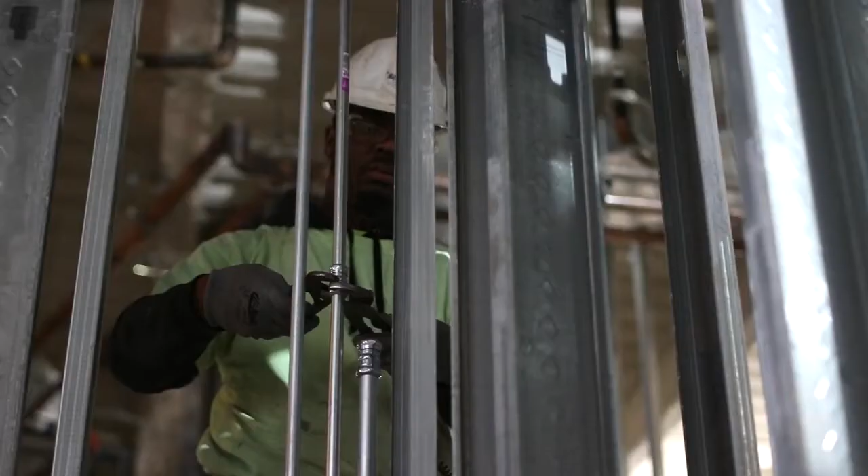I was working at Riley Hospital at the new maternity section that's being built. I went into this internship expecting to be doing a lot more like cleaning and busy work like that, but I really ended up not doing much of that at all and got to experience everything pretty firsthand.

As soon as I graduated high school, I started working construction. I've actually done everything from roofing to metalwork to carpentry, pretty much everything. But coming to ERMCO was completely different. Here I learned a lot.

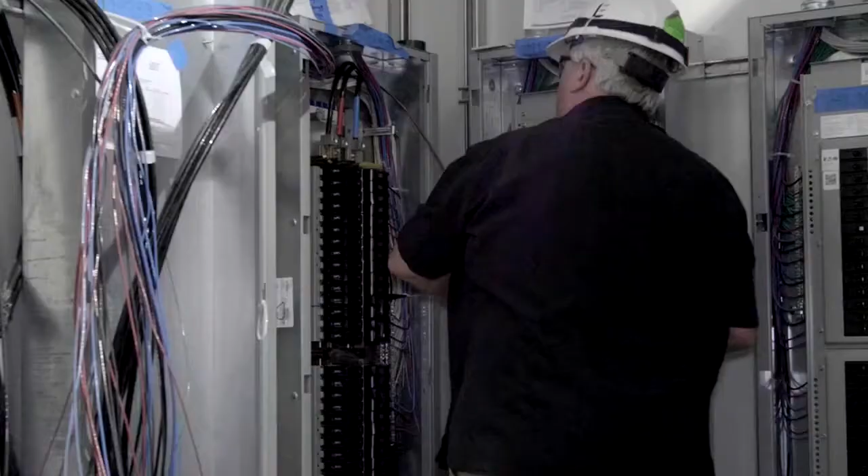I met a lot of people, really nice people, and they're always there. They'll be like, do this on your own. Once you're done, come get me and I will check over it, and then we can go back through if there's anything you didn't understand.

We always try to take the underclassmen and find an opportunity for them to actually go out and work hands-on on a job site. And then they bring that knowledge and that understanding of the means and methods of installation into our overhead operations for their last 2 years with us. So we really try to build a well-rounded intern that can bring the most to the team, but learn the most as they're a part of our team as well.

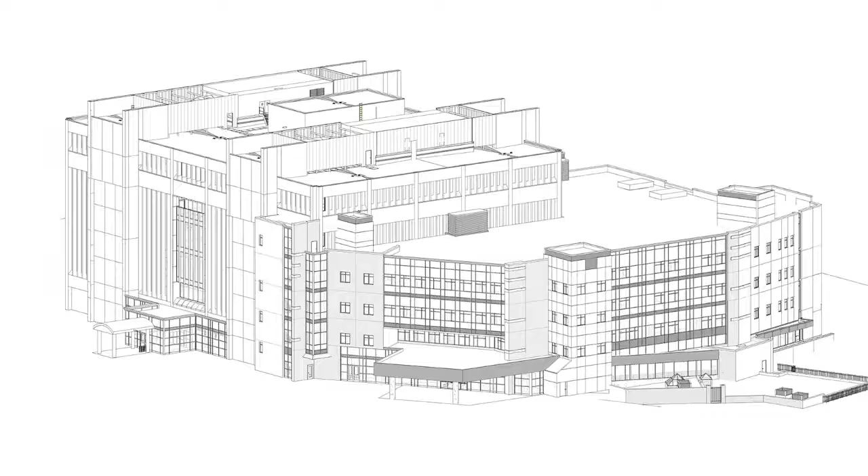Throughout my experience with ERMCO, I've learned a lot. I've learned so much, from estimating to project management to design build to turnkey work. And we're currently working on the IUPUI project now, so I'm still learning a lot as I'm going through.

Project management, looking over contracts, reviewing financials, and just making sure the work's getting done in a timely and correct manner. This summer I was with Drew Pojar in pre-construction services, basically doing a little bit of everything I felt. So I did some takeoff and helped out with pricing jobs and a little bit of estimating. And then this summer I worked with Dave Cavanaugh over in the design build area.

When I came to the site, it was staggering just to see how large and massive and complex that entire system had to be. I worked primarily with the security system and trying to understand how that all went together and how different changes were being put in by different contractors and trying to reconcile them with our own decisions.

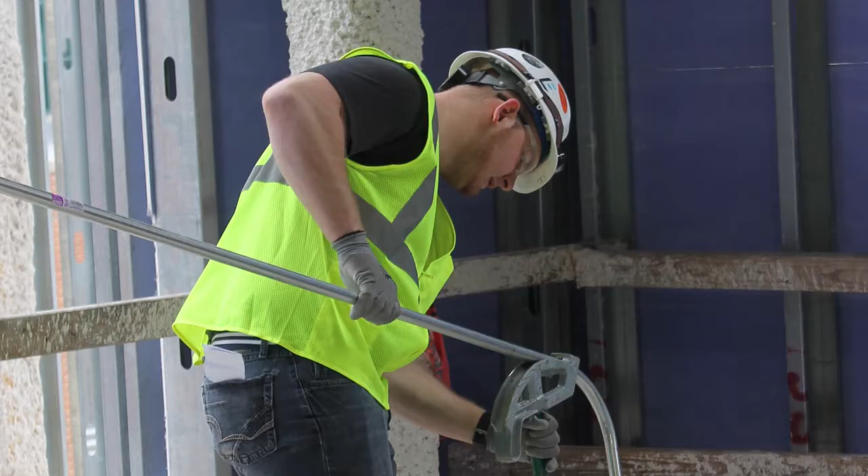Starting from the first day, I was roughing in rooms with a journeyman, and I was pretty much just putting things in place where he told me to. But towards the end of that task, I had been bending my own conduit and starting to understand the prints, which was something that was a little overwhelming at first. I didn't have too much experience with it. But towards the end, I became very confident.

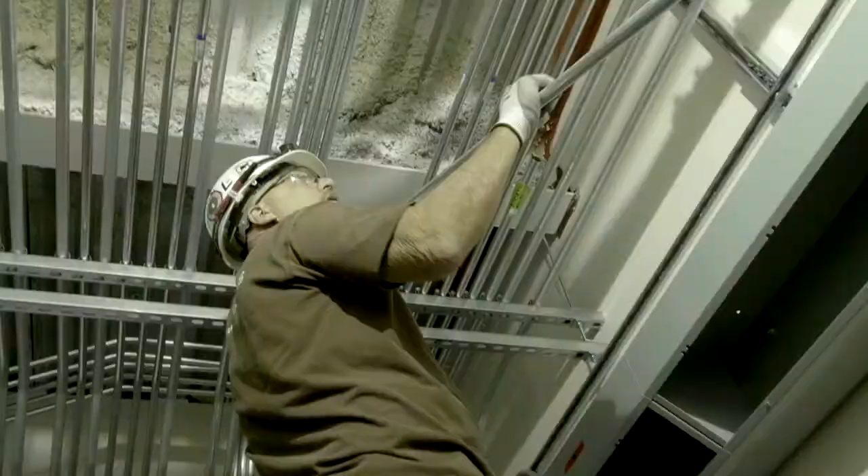This summer, I was in the construction services department. My favorite part was the freedom that I got to work here. Because, for example, Chris used to assign me some project and tell me that, Sahaj, this is your baby and you've got to know everything about it and take care of it.

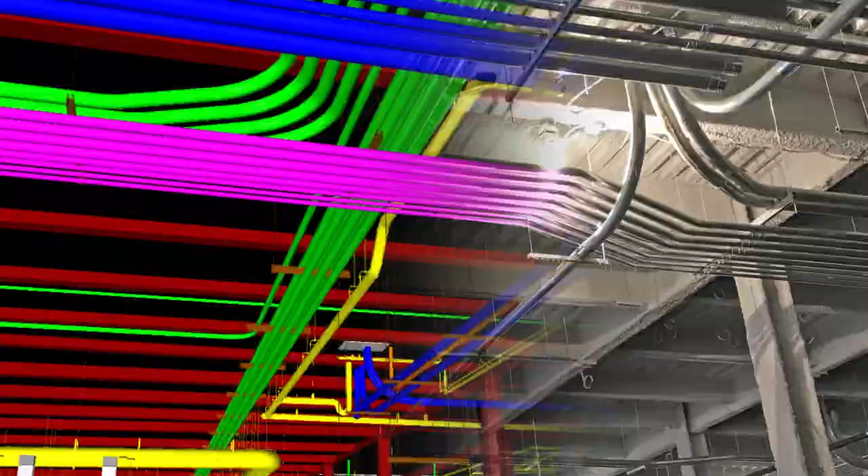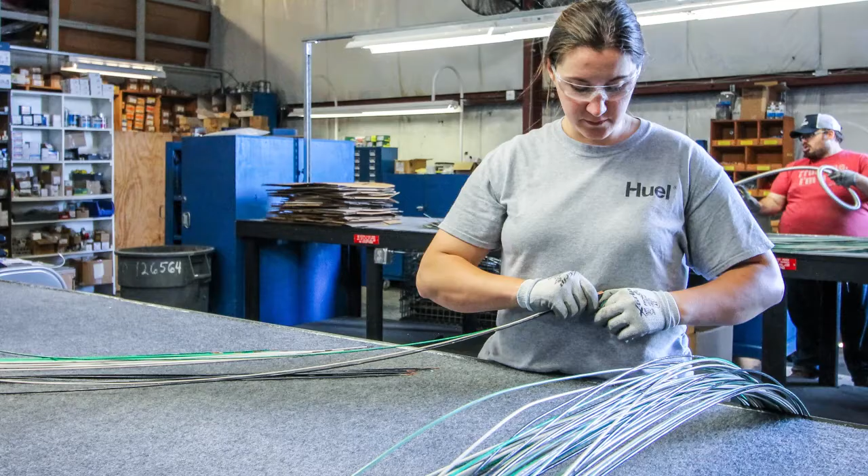So that was good. Anything from wiring to even general electrical theory is not something I had spent a lot of time with. But as far as estimating goes, it's really the essence of capturing cost, capturing hours, but also just the purpose you serve as an estimator, and really what takes you over the top from someone who's just doing takeoff to someone who can be value beyond that.

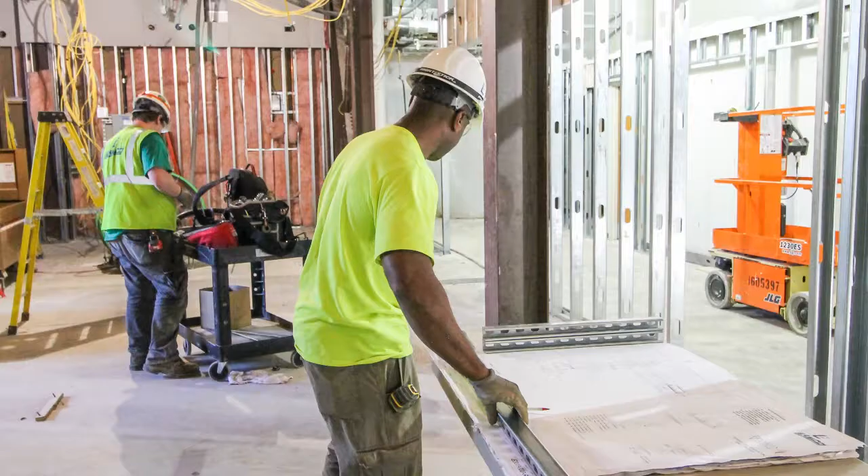I basically knew nothing about pre-construction coming in, and so it kind of just showed me the entire process of, when you get an opportunity to, hey, let's do takeoff and then move to pricing it and then actually sending out your bid proposal. I was out in the field for this summer. I was at CEP down in Columbus.

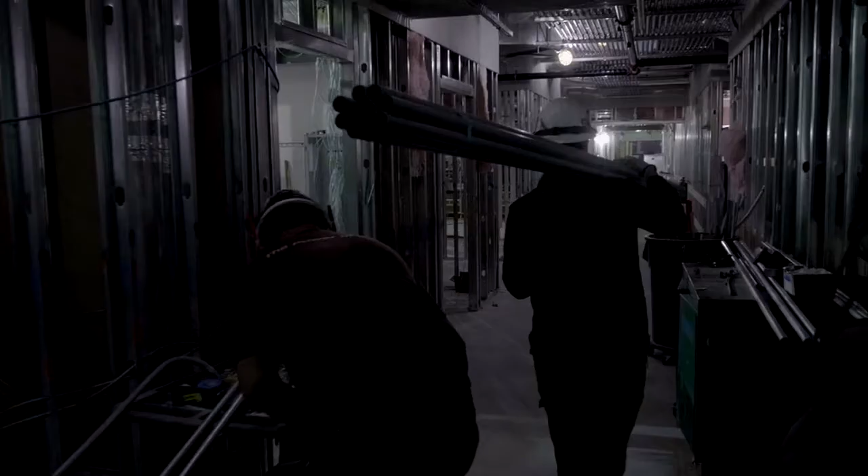I learned a lot about pulling wire, running pipe, having the knowledge to use all the various tools on the job site. That was exciting because I walked in here knowing literally nothing about any tools, any construction work ever. So that was fun to learn.

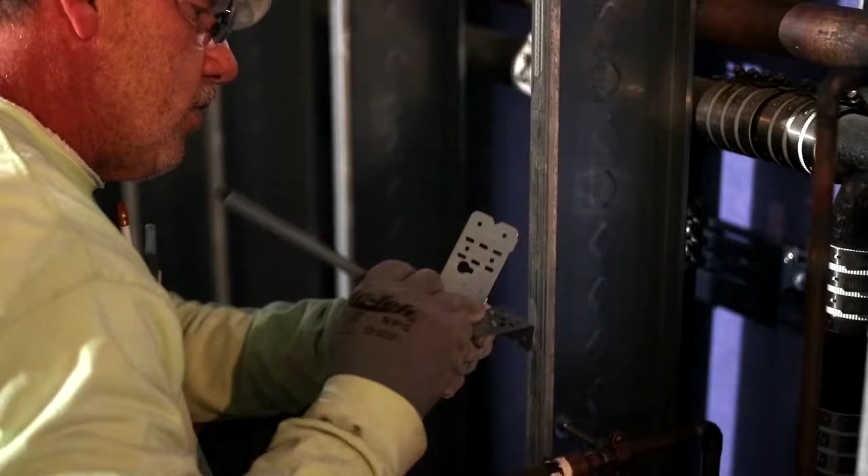But overall, I was very happy with everybody I came across and met. They were all wanting to give advice and stuff, so I picked up a lot of knowledge from the people who have been there, who have been doing this forever.

Another important thing I'd say I learned, I didn't realize this. They don't really teach it in school, I guess, but there's a lot of emphasis on keeping the relationships, whether it be with subcontractors or your suppliers or even owner, engineer, whatever.

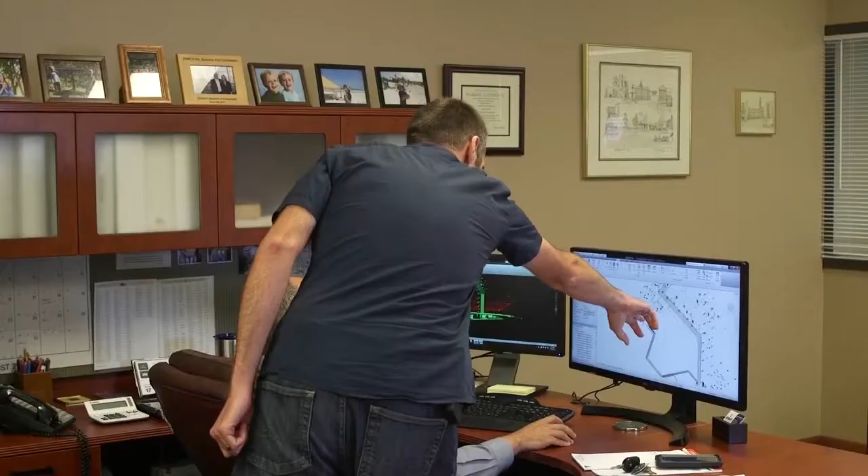My time with Dave also helped me realize how broad and how expansive this entire field of engineering, just electrical in general, how many different avenues it could take me. It's really broadened my mind to what I could possibly do.

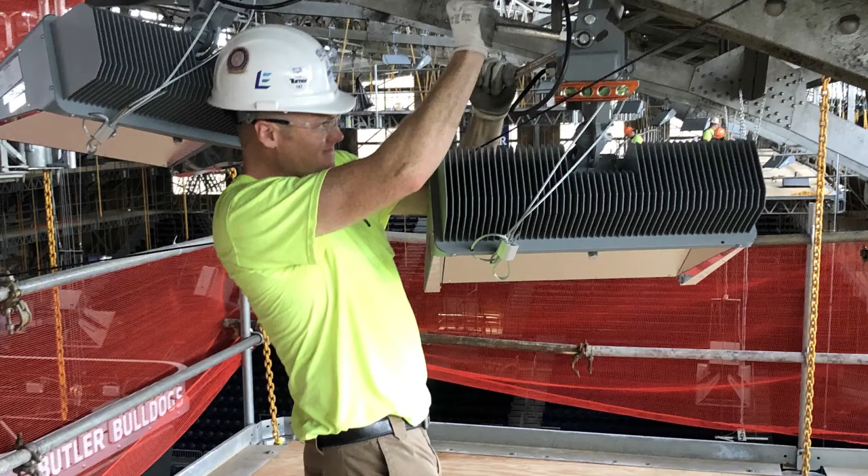So it's really cool to see from all sides, and especially after taking off, you know, all the buildings and learning how these things are typically wired, typically set up, typically installed, and how much money and time these things take.

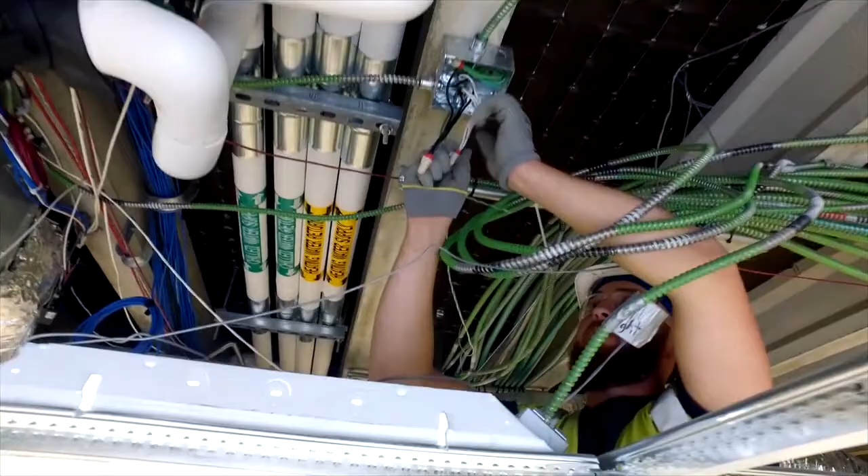As far as a career standpoint, ERMCO has opened my eyes because it actually showed me that what I'm learning in school is more so theory-based knowledge, versus in the field it's more hands-on. A common analogy that I like to use with my schoolwork is that school teaches me my ABCs and how to make words out of them, and being in the field work with ERMCO teaches me how to put them together and make sentences. It was an amazing experience here, and I hope to do it again in the near future.

I'm very thankful for the opportunity to come here and learn a lot. If I had to say I had the most favorite part about the company working with ERMCO, it would be ERMCO itself, just because ERMCO has such a great culture.

From the first day I walked in, my experience was one that I've never experienced before. Overall, this internship, it's been probably the best work experience I've had thus far in my life, and I'm very glad I had the opportunity to work with ERMCO.